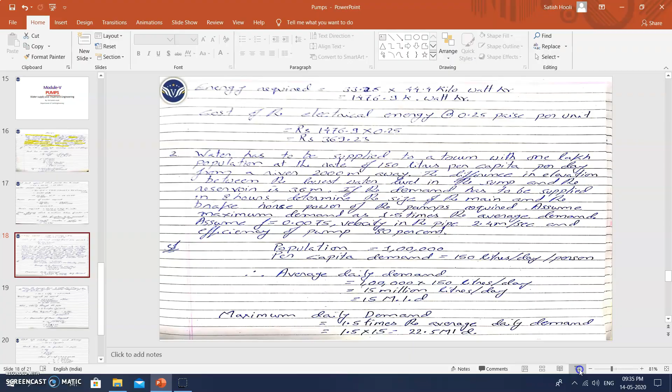So today we are going to see a few problems regarding pumps. Okay, so it is in module 5 in the WSTE subject itself. So we'll start with the problem itself. So in the problem, he has stated that a centrifugal pump which is being driven by an electrical motor lifts the water from a total height of 50 meters from the reservoir to discharge

at the end. Okay, the pump efficiency is around 77% and the motor efficiency is around 85%. The lift is through a 300 meter length and a 10 centimeter diameter pipe, and the pumping rate is around 1500 liters per minute, and f equals 0.025. What is the cost of pumping 4 million liters, when the power cost is 25 paisa per kilowatt hour?

So in this problem, he has said that the total height is 50 meters. So this consists of HS plus HD. It doesn't consist of HF. Okay. So in the previous part you can see that the total head equals HS plus HD plus HF. So you need to find out here what HF is. HF is nothing but head loss due to pipe friction. It is given by the equation f' L V square by 2gD, and that equation can be rewritten in this sense itself.

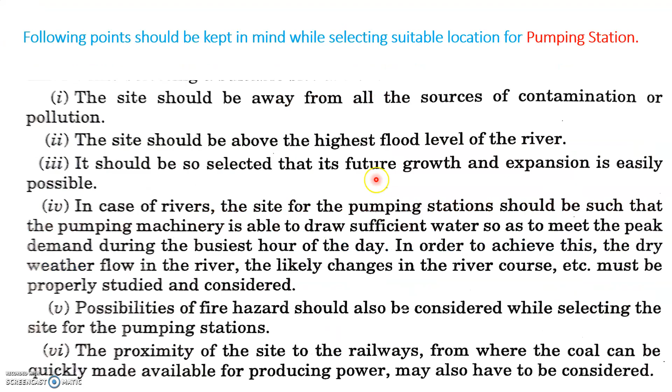Now we are using that equation. So first we are finding out the water power value. We are putting rho W Q into H. So rho W is 9.81. Q is 0.025, which we have found earlier itself. H is 88.77. So that will be a value around 21.77. So 21.77 divided by 0.735.

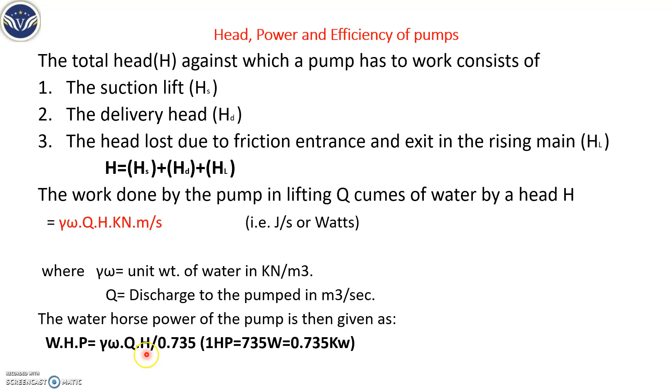So that is because 1 HP is equal to 0.735 kilowatts. That has been stated over here, we can see this equation. So we have put 0.735 kilowatts, the value that is there in that equation itself, and substituted it. So you're getting the water horsepower as 29.62. Then the water horsepower divided by efficiency gives the horsepower.

So efficiency, there are two types here. One is motor efficiency, one is pump efficiency. If they had given only one efficiency, you should have taken only that. But here they have given both pump and motor efficiency. So dividing by that efficiency, you will get the horsepower, that is 45.26. So 45.26 into 0.735, when you do it, you'll have the total power requirement. This total power requirement is per hour.

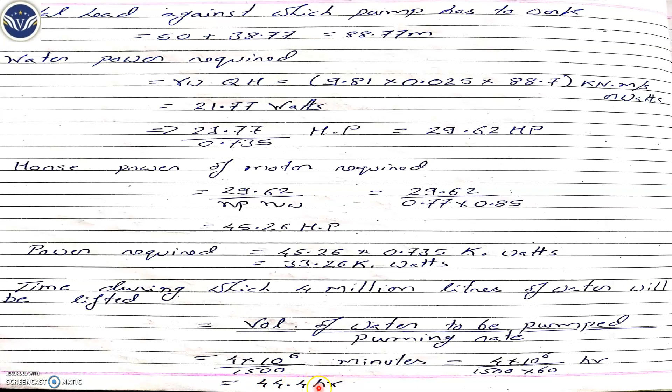Now at the end, you need to find out how long the water is being pumped. To do that, it is the volume of water being pumped divided by the rate of pumping. So that is 4 million liters divided by 1500, and divided by 60, it will be converted in terms of hours. So you'll have 44.44 hours. When you multiply this 44.44 by the power you got per hour, it will be around 1476.9 kilowatt hours.

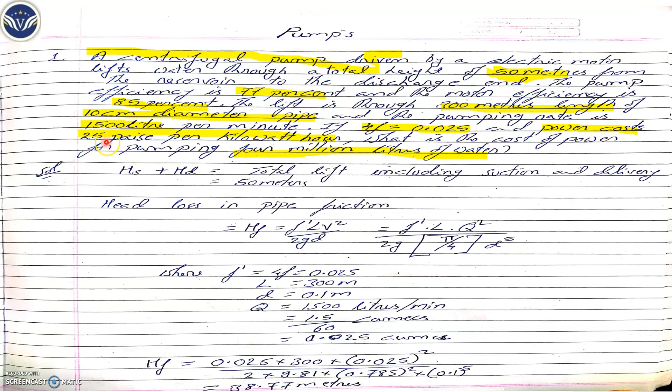Okay, so now what's the cost? The cost has been given per kilowatt hour. So we multiply this value by 0.25, which is already given in the problem itself, the power cost of 25 paisa per kilowatt hour. So you'll have a value around 369.23. So this is the cost of electric energy. Okay, so this is all about the first problem. Now going to the second problem.

So what is given in the second problem is that water has to be supplied to a town with 1 lakh population at the rate of 150 liters per capita per day, from a river 2000 meters away. The difference in elevation between the lowest water level in the sump and the reservoir is 36 meters.

Please remember these points. The demand has to be supplied in 8 hours, because normally the labor timing is an 8-hour period for the man working in a pump station. So you need to pump the total quantity of water within that 8-hour duration. Determine the size of the main and brake horsepower of the pump required.

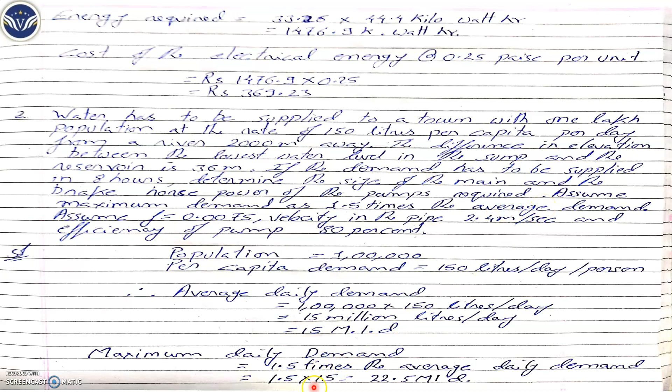Now this needs to be multiplied by the peak demand, given as 1.5 times. Where is the question? Here it is. So 1.5 times the average demand. Multiplying, we'll have 22.5 million liters per day.

As I stated earlier, you need to supply the water in an 8-hour duration, so the quantity becomes more. For that, we do 22.5 into 24 divided by 8. This much quantity is required to be pumped in that 8-hour duration. Now this discharge has to be converted in terms of cubic meters.

So 67.5 into 10 raised to 6, that is million liters, divided by 10 raised to 3, converting from liters to cubic meters, divided by 24 into 60 into 60. 24 is the day, 60 is a minute, 60 is a second. You'll get a value around 0.781. The velocity is already given, that is 2.4.

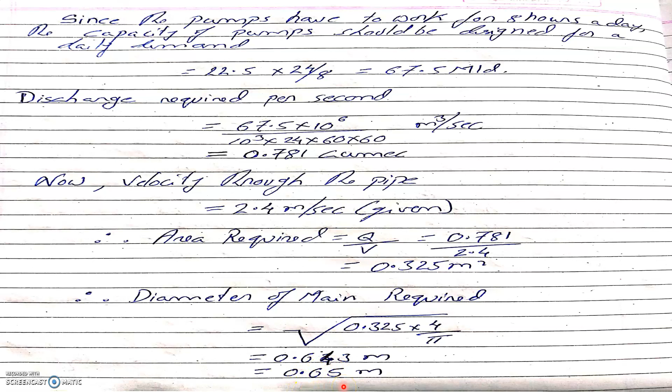So the area is Q by V. Dividing Q by V, you get 0.325, the area of the pipe. D equals the square root of A into 4 by pi. So 0.325 into 4 by pi under root gives a value around 0.64. Rounding this to 0.65 meters, 0.65 meters will be the diameter of the pipe.

Next, he has given 36 meters. As I stated, that 36 is Hs and Hd. You need to find Hf to get the total height. Hf is the head loss due to friction, given by the equation f' L V squared by 2gD. f' is nothing but 4f. f is given in the question as 0.0075, so you need to multiply it by 4.

He has given f, not f'. Remember that point: we require f' here, and only f is given, so multiply f by 4. That value is around 0.03. L is given, V is given, D we have calculated. By doing so, we have calculated Hf equals 27.17.

Now what will be the total H? Total H consists of Hs, Hd and Hf. So 36, which is given, plus Hf, 27.1. Now what will be the horsepower requirement? This equation is already given in the theory: rho w Q g H divided by eta into 0.735.

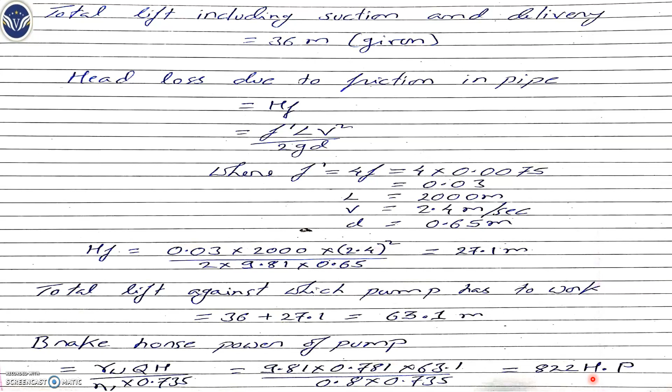Here the value will be 9.81 into 0.781 into 63.1 divided by 0.8 into 0.735. The total horsepower will be around 822 horsepower. This ends the second problem. In this way, you calculate the horsepower of the pumps. This ends a few problems regarding pumps.